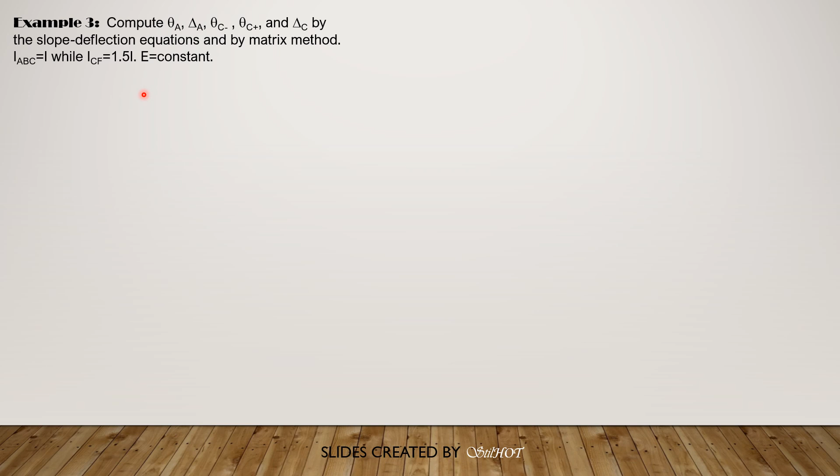The problem: compute theta A, delta A, theta C just to the left, theta C just to the right, and delta C by the slope deflection equations and by matrix method. I ABC is I, then I CF is 1.5I, with modulus of elasticity E constant.

So recall the reactions at B, which is 35 upward, then 10 just to the left of C, 372.5 at D, 97.5 at E, then 10 just to the left of C, 10 just to the right of C by action-reaction.

So we need to have moment BC and moment BA. Moment BC is negative 25 times 2, while moment BA is positive 50. Negative 25 times 2 is negative 50. So if moment BC is negative, then moment BA is positive from the slope deflection equation, because clockwise moment is positive. So that's why moment BA is clockwise, so it is positive.

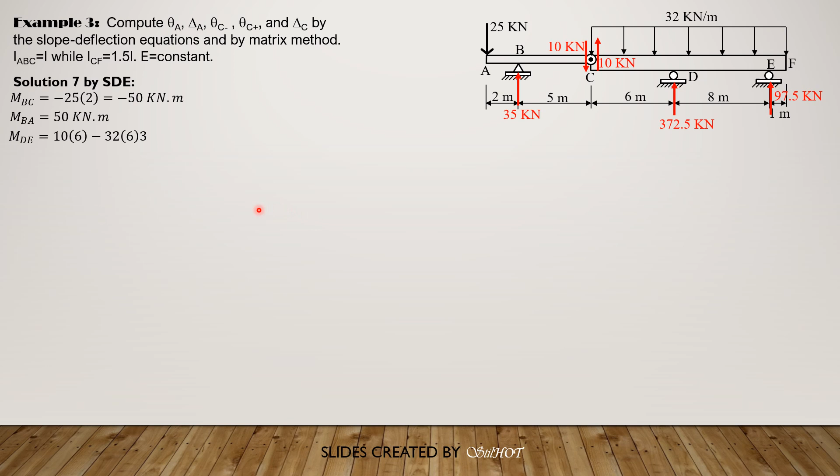Then moment at D, or moment DE, is equal to 10 times 6 minus 32 times 6 times 3. So moment DE is equal to negative 516 kilonewton meter. So moment DC is positive 516 kilonewton meter. Moment EF is negative 32 times 1 times 0.5, so negative 16.

So let's now set up moment DE. So moment DE equals 2 times E times 1.5I over L, which is 8, times quantity 2 theta D plus theta E minus 3 times delta over L, because D and E are supports, so the chord will be horizontal, so there will be no delta, 0 over L.

Then minus the fixed moment at D, because D is to the left of E, so it is negative 32 L squared over 12. So simplifying this equation, we have 2 theta D plus theta E equals negative 8,288 over 9 EI. Call that equation 1.

Then let's set up moment ED. Moment ED is positive 16. So moment EF is negative 16, negative 32 times 1 times 0.5. So moment ED is positive 16 kilonewton meter.

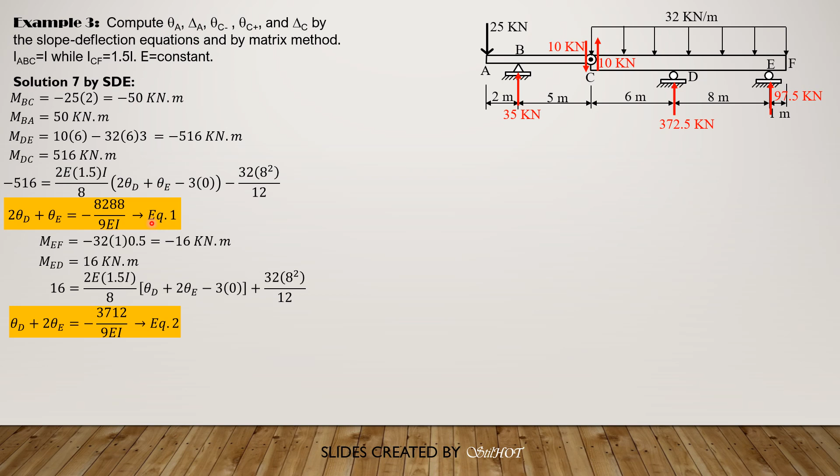Solving equations 1 and 2 simultaneously, we get theta D equals negative 4288 over 9 EI. Because this is negative and the assumption in slope deflection equation is clockwise positive, this is counterclockwise, so the slope at D is positive 4288 over 9 EI. And theta E is 32 over EI, so that's clockwise, so the actual value of theta is negative.

Then we consider MCD, which is equal to 0 because this is a hinge, and it is equal to 2 times E times 1.5I over 6. The length is 6. Quantity 2 theta C just to the right, plus theta D, which is already computed, negative 4288 over 9 EI, minus 3 delta C.

So let's assume that C rises so that the chord joining C and D is clockwise, so that everything will be positive in the slope deflection equation. So minus 3 positive delta C over 6. Again, the assumption is the deflection is upward. Then minus the fixed moment at C, which is negative 32 times 6 squared over 12. So simplifying, MCD equals 0 equal to 2 theta C plus, so it's the same equation.

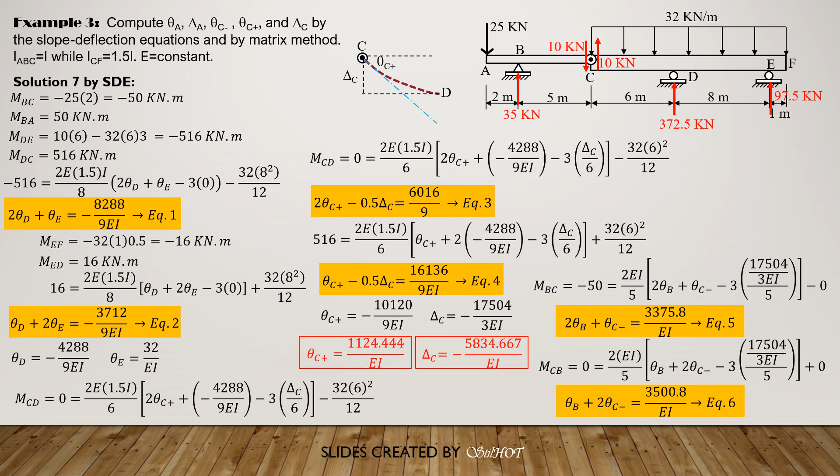Solving equations 5 and 6 simultaneously, so let's copy the equations again, we get theta B equals 1083.6 over EI, and that's clockwise, so if that is required, it's negative as final answer. Then theta C just to the left is 1208.6 over EI. This is clockwise, so therefore our answer for theta C left is negative 1208.6 over EI.

Then let's have MAB and MBA. MAB is 0. There's no moment here. Then it is equal to 2 EI over 2 times quantity 2 theta A plus theta B, which is 1083.6 over EI clockwise from the slope deflection equation. Then let's assume that A is above, so that the rotation of the chord joining AB is clockwise again.

So delta A is treated positive, so minus 3 times delta A over L, 2. Because there's no load in between A and B, imagine that A and B are fixed ends, that's why there's no fixed moment. So, simplifying, 2 theta A minus 1.5 of delta A equals negative 1083.6 over EI. Equation 7.

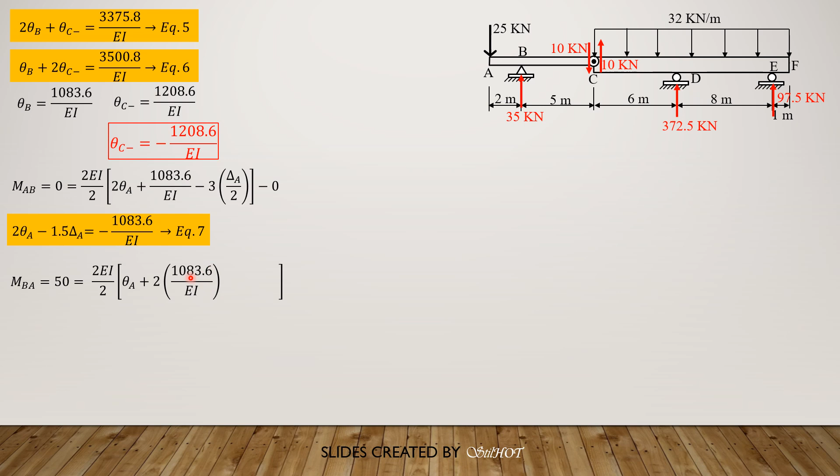Then MBA. MBA is positive 50, and it is equal to 2 times EI over 2, quantity theta A plus 2 theta B, which is this, then minus 3 delta A over 2. There's no load in between, so plus 0. So simplifying, theta A minus 1.5 delta A equals negative 2117.2 over EI, equation 8.

So before we solve this, actually, because the far end A for MBA has 0 moment, then we use the alternate equation, supposedly, which is 3EI over L, times quantity theta near, which is theta B, minus delta over L, or delta A over 2, then minus fixed moment at B, which is 0, minus 1/2 fixed moment at A at the far end, which is also 0. So therefore, we can use that to solve for delta A directly.

So 50 equals 3EI over L2 times theta B minus delta A over 2, or psi, or rotation of the chord, which is delta A over 2, then plus fixed moment at B 0 minus 1/2 fixed moment at A 0. So from here, we can solve delta A directly. And delta A is equal to positive 2100.533 over EI. So that means our assumption that A is above B is correct. So that's the final answer for delta A.

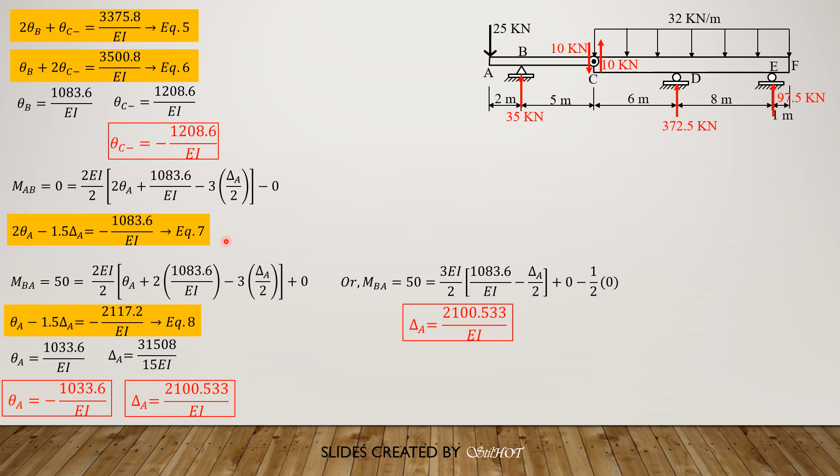Or if we solve equations 7 and 8 simultaneously, then we'll have theta A equals 1033.6 over EI, because that's positive, that's clockwise by slope deflection equation. And delta A is equal to 31508 over 15, or in decimal, that's the same as this. So theta A, because this is clockwise, that's negative slope in the universal convention. So negative 1033.6 over EI, and delta A is positive 2100.533 over EI. So that's it. That's the solution to this problem by slope deflection equation.

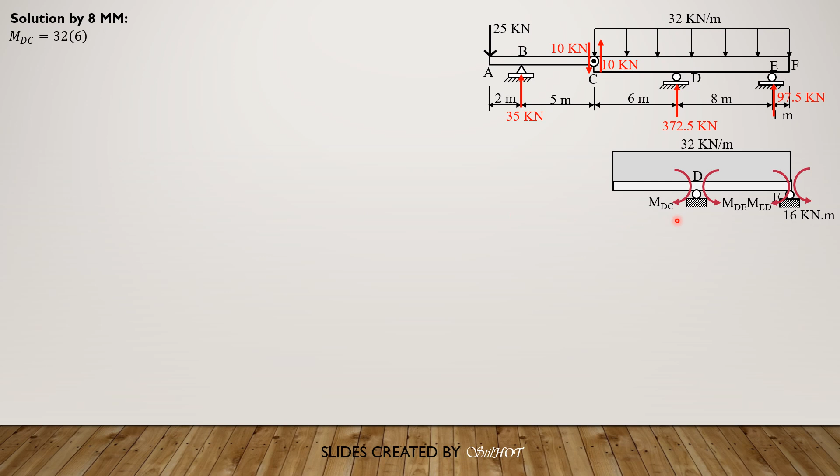Next method is by matrix method. So the reactions are already shown. Then let's compute MDC as if this is an overhang, because the moment at C is 0. So it is equal to 32. So we have MDE also, and ME. And this is 16. And MED is W, 32 times 8 squared over 12. So MDC is equal to 32 times 6 times 3 minus 10 times 6. So MDC is equal to 516 kilonewton meter. So that's why it's already presented here.

Then MDE is equal to MED, and it is equal to 32, WL squared over 12. So 32 times 8 squared over 12. Sorry. Then 512 over 3 kilonewton meter. So if this is node 4 and node 5, then at node 4, the loading here should be MDC, which is 516, minus MDE, 512 over 3. If it is positive, then it should be applied counterclockwise. So it is positive, it is 516

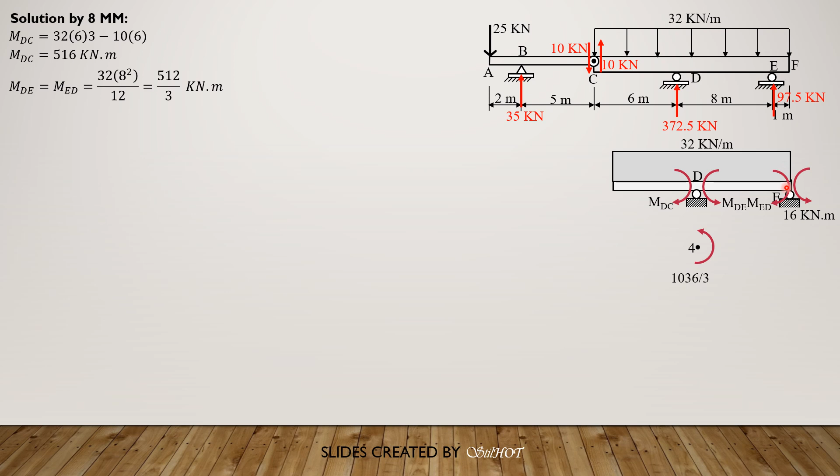minus 512 over 3. So we treat clockwise positive minus the counterclockwise, because remember the nodal load is opposite to the net moment at a joint. So because it is positive, it should be applied counterclockwise. So 1036 over 3. Then the load at E at node 5 would be 512 over 3 minus 16. 512 over 3 minus 16 is positive, so it is also counterclockwise.

So let's consider DE. The stiffness of DE is 12EI over L cubed, the first. So because D and E are supports, we ignore the nodal vertical forces, so F7 only. Then the nodal load at 8 is 1036 over 3. At 9, downward is ignored because we are just concerned with the deflection. So at 10 is 464 over 3. Then we factor out EI. 9 over 256 is from the stiffness of the beam element. 12 times 1.5, because I is 1.5, divided by L cubed, 8 cubed, you'll get 9 over 256.

The second one is 6EI over L squared. So 6 times 1.5 over 8 squared is 9 over 64. Then this is the negative of this entry here. Then you just copy the 9 over 64 there. Then this is the same, 6EI over L squared, so that's 9 over 64. 4EI, 4 times 1.5 divided by 8 is 0.75. Then this is just the negative of this value here. Then this is half of that value.

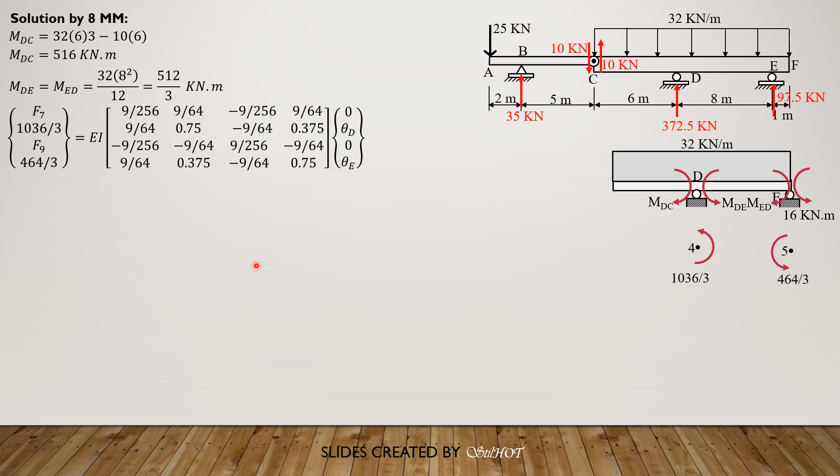Then the third row elements are the negatives of the first row elements. And the fourth row elements: you copy the second row elements, except that we interchange values 0.75 and 0.375 in this manner, right? And the rest will be copied. Then we have delta D, which is 0, then theta D, then delta E, which is 0 also, then theta E. So we expand rows 2 and 4. We simplify this equation because the other displacements are 0. So that would be 0.75 theta D plus 0.375 theta E equals 1036 over 3.

Then the other equation is 0.375 theta D plus 0.75 theta E equals 464 over 3. So solving these two equations simultaneously, we get theta D equals 4288 over 9 EI, and theta E is equal to negative 32 over EI. So these are the correct sign conventions. So it means this is counterclockwise and this is clockwise rotation.

So having found that, we proceed to consider CD because we have found theta D. So remember, we have 10 kilonewton here. So imagine CD to be fixed-ended. Let's solve for the fixed-end forces. So by symmetry, this is 32 times 6 over 2, so 96 upward at C. Then the fixed-end moment here is 32 times 6 squared over 12, which is also 96.

Because there is already an upward load here, we have 96 for the vertical load. Supposedly the nodal force is 96 downward, but because there is an upward force here, the net nodal vertical load at C would be 86 downward. And because this is counterclockwise, we have clockwise at node 3. So if this is 3, we have 86 downward and 96 clockwise or negative. So F5 is negative 86, then F6 is negative 96. Then F7 and F8 are unknowns.

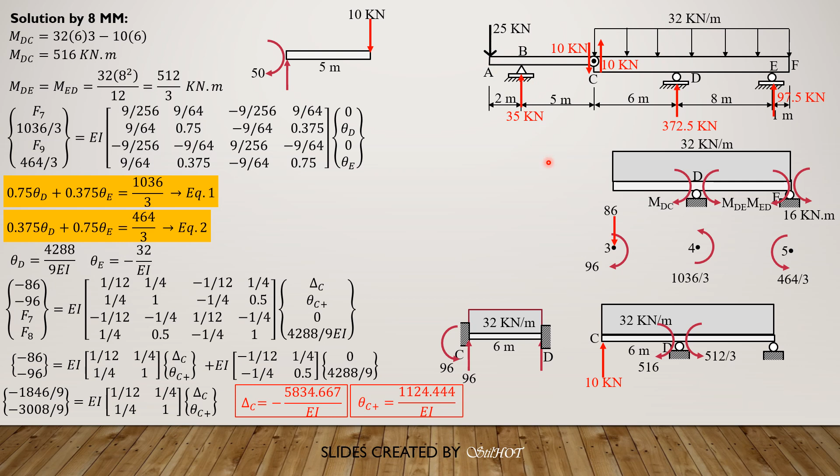Then we consider BC. Remember, we have a load here of 10. There's no load in between. Then the moment here at B just to the left is 50. 25 times 2 is 50, and it should be clockwise so that it opposes the moment due to the 25 kilonewton load. So if this is B, then the nodal forces at B would be F3, and F4 is the opposite of the clockwise moment, so counterclockwise 50. And because this is B, the vertical deflection is 0, so we don't mind that.

Then at 3, we have 10 kilonewton downward only. So let's set up F3, then 50, then negative 10, then F6. EI, then 12 times 1, because EI is constant here, divided by 5 cubed is 12 over 125. This is 6 times 1 over 5 squared, so 6 over 25. The negative of this first entry, then we copy 6 over 25 there. Then this is 6 EI over L squared, so 6 over 25. This is 4 times 1 over 5, so 4 over 5 is 0.8.

Then the negative of 6 over 25, then one half of 0.8 is 0.4, the negative of the first row again, then copy the second row except that we interchange the second and the fourth position, like that. And we have 0 displacement at B, then we want rotation at B, theta B, then we have already computed delta C, which is negative 17,504 over 3EI, in decimal equivalent to this, then theta C just to the left.

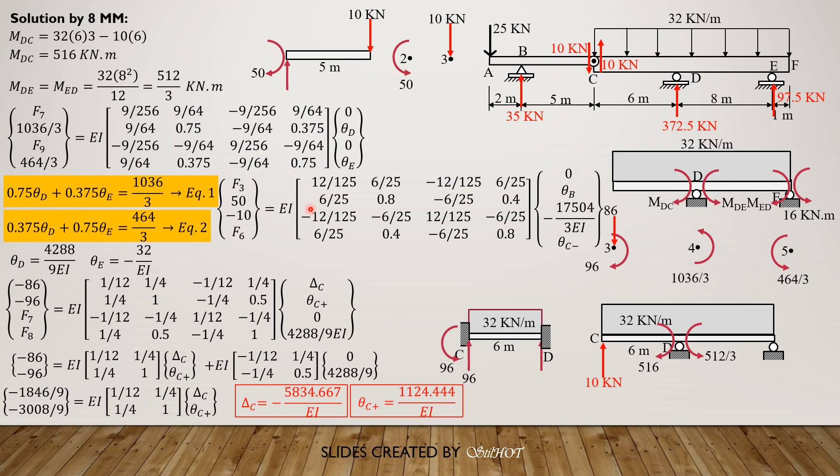So we expand rows 2 and 3. So let's expand rows 2 and 3. This is the matrix before. So we have 50, negative 10 equals EI 0.8, negative... rows 2 and 3, sorry. So 0.8, 0.4, negative 6 over 25, negative 6 over 25. And we have quantity theta B and theta C just to the left.

Then plus EI of 6 over 25, negative 6 over 25, negative 12 over 125, 12 over 125 times 0 and negative 17,504 over 3EI. So this new entry value here is equal to 50, and we have 0, this is positive, so 50 minus 6 over 25 times 17,504 over 3, that would be negative 33758 over 25, then negative 10 plus, because 12 over 125 times negative 17,504 over 3 is negative. When we transpose it, then it becomes positive. So negative 10 plus 12 over 125 times 17,504 over 3 is 68766 over 125.

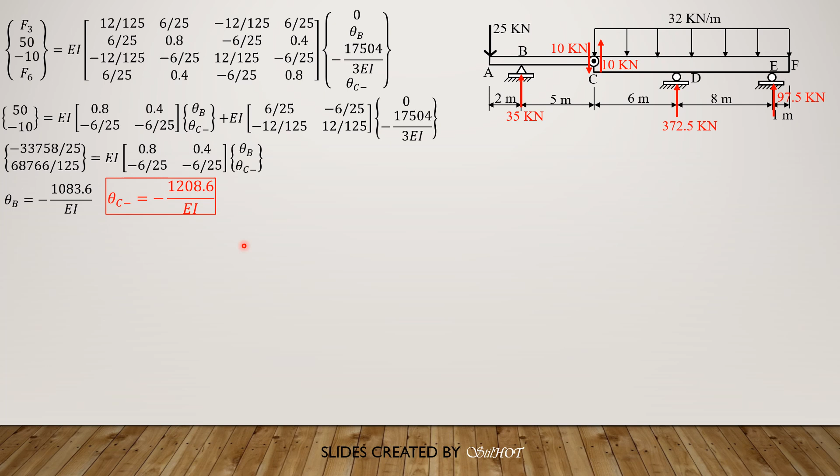Then let's consider AB, the last. So the load at 1 is, because we don't mind B because we have found theta B, just the load which is 25 downward and there's no moment. So F1 is negative 25, F2 is 0, F3 don't mind, F4 don't mind, then EI. Then 12 times 1 over 2 cubed is 1.5, 6 times 1 over 2 squared is 1.5, then the negative of the first, then you just copy that.

Then this is 6 times 1 over 2 squared, so 1.5. 4 times 1 over 2 is 2. Then the negative of the first entry, then one half of the second entry here, then the negative of the first row, then this is the second row, except that we interchange position between the second and the fourth. Then we have delta A, theta A as the unknowns, and 0 displacement, then negative 1083.6 over EI, which is equal to theta B. This is delta B, so 0.

So expanding rows 1 and 2, negative 25, 0 equals EI matrix 1.5, 1.5, 1.5, 2 times delta A, theta A, plus another matrix EI times negative 1.5, 1.5, negative 1.5, 1 times the matrix 0 and negative 1083.6 over EI. So the new value here is negative 25, then 0, 1.5 times negative, so positive. So this is negative 25 plus 1.5 times 1083.6. And the second entry is 1083.6.

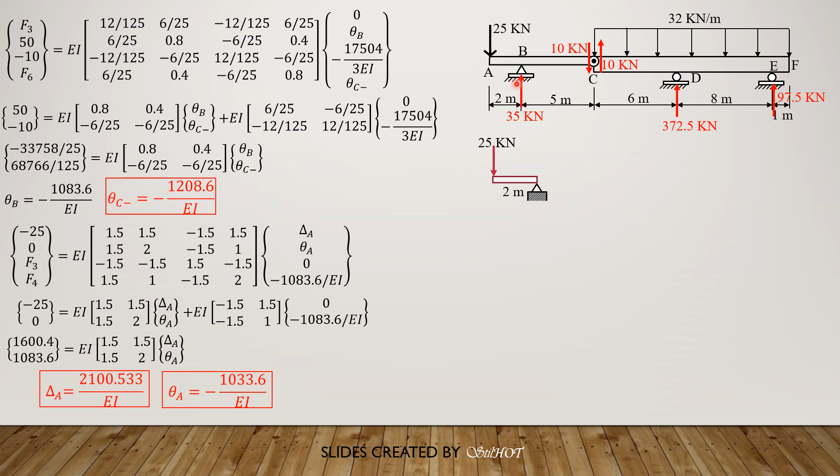And these answers are similar to the other methods, 7 methods of computing deflections. So I hope that you are able to follow the solution, though this problem is a little bit challenging.